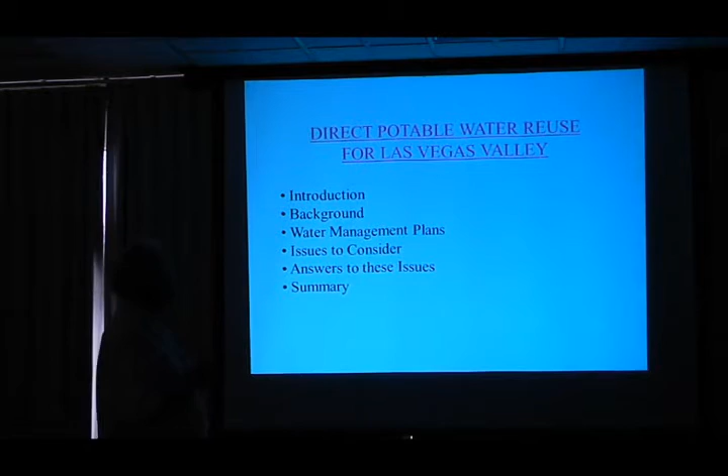So, with that, we're going to talk about a little introductory material first, then some background. I think it's important that we have background material to base what's going to come after. Then I'm going to discuss the water management plans, specifically the 300-mile pipeline going north, and my direct potable water reuse alternative. Issues to consider, I'm going to discuss those issues that have been brought up to me by my colleagues as being problems, but I call them challenges, I call them opportunities, and you'll see what I mean later on. With answers to these issues, and then a summary.

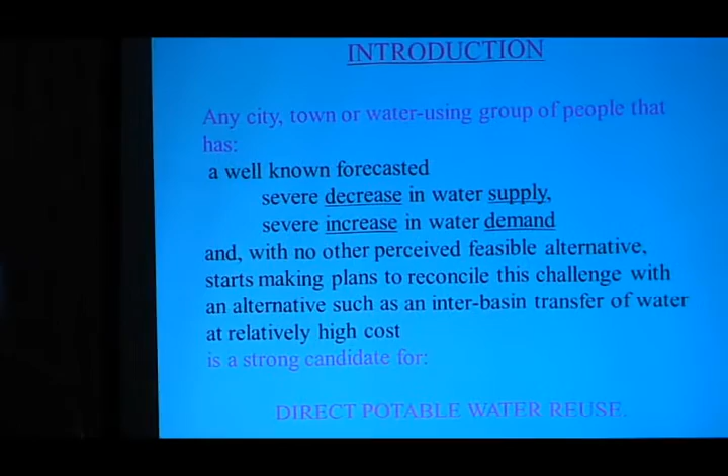Okay, let's get going. I start with a premise. You know what a premise is? It's something before, as a thought. Any city, town, or water-using group of people that has a well-known forecasted severe decrease in water supply, and also a severe increase in water demand, and at the same time, a feasible alternative might be to make plans for interbasin transfer of water. Does that sound familiar? Like that might apply to us here in Las Vegas Valley? Yes, it does. But I'm saying that that is a strong candidate for direct potable water reuse. I'll hope to justify that in a minute.

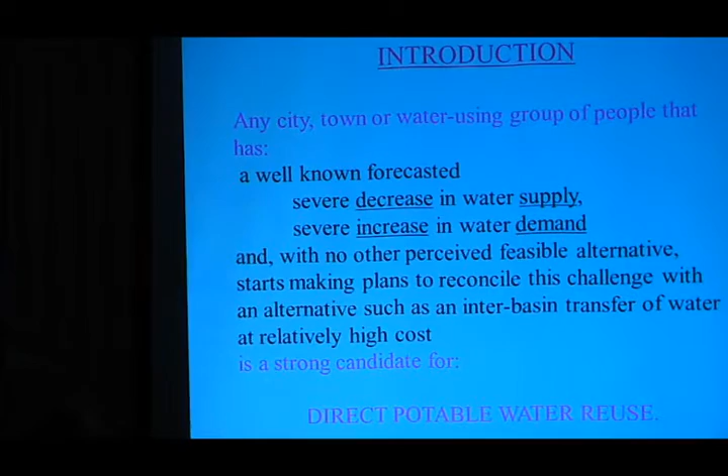So what is direct potable water reuse? Well, it's defined in the Journal of Water Reuse as the term that refers to the introduction of purified water derived from municipal wastewater, after extensive treatment and monitoring to assure that strict water quality requirements are met at all times, directly into a municipal water supply system. Kind of, the English grammar here is there's a noun and a verb: the noun is purified water, and the verb is that it's introduced into a municipal water supply system.

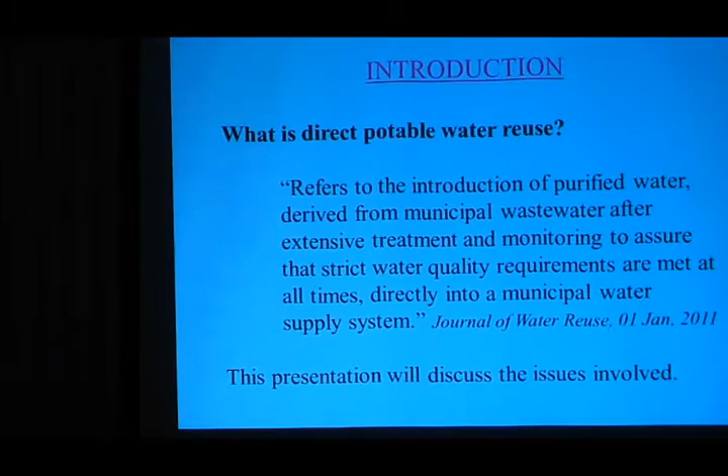So this presentation will discuss those issues.

A bunch of acronyms, which most of you are familiar with. Adrian, is that you? So let me retake it. All right, start.

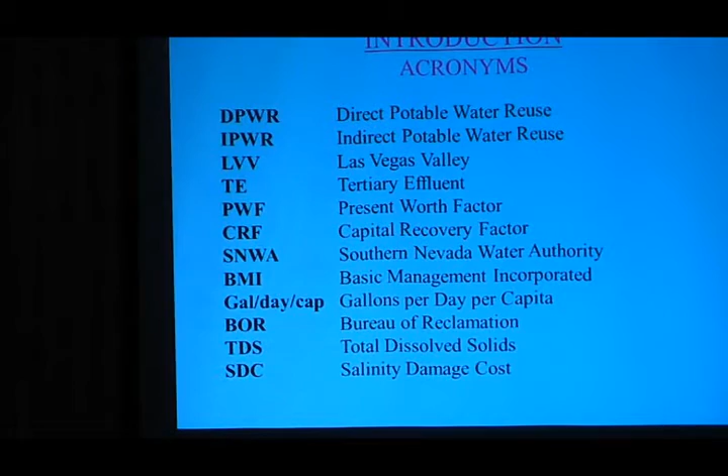Most of you are familiar with these acronyms, so I won't even go over them, but you can look at them for me. I will point out one little peeve I have, if I can point to it: gallons per day per capita. Most people say gallons per capita per day. That's just a peeve of mine, it's flow per capita, so it's gallons per day per capita. And when you use it in a formula, you're multiplying gallons per day per capita times capita, the capitas cancel out. When I teach operators about unit dimensional analysis, then it makes a lot more sense to use gallons per day per capita. That's in conflict with many people that talk about per capita flow.

Okay, let's go to the next. Okay, I want to introduce some background material. Existing water sources for Las Vegas Valley are 3 sources.

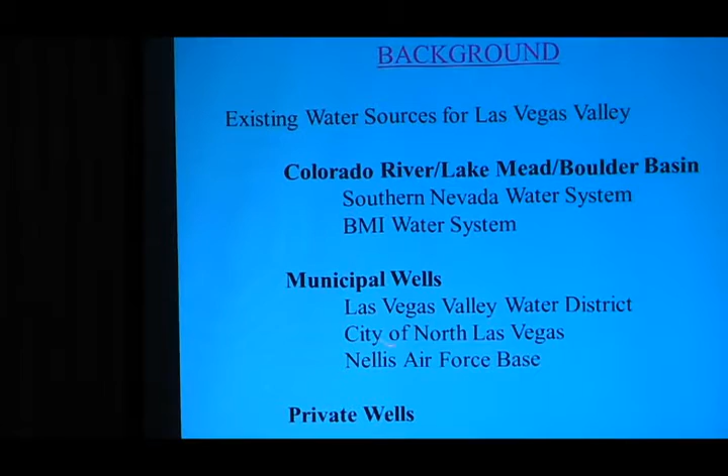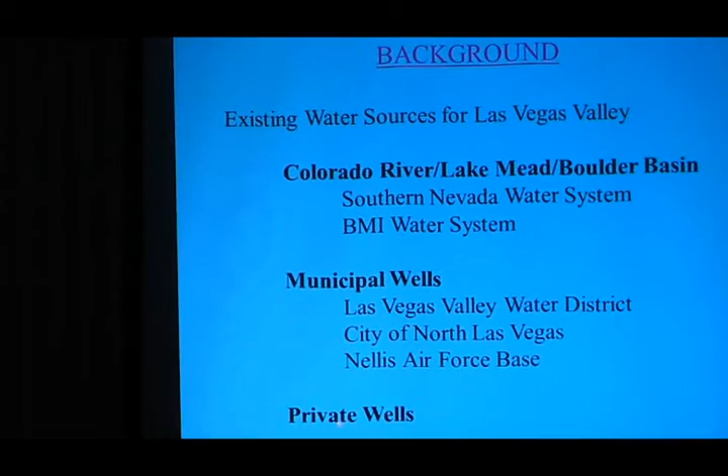Colorado River, as most of you know. Municipal wells, which some of you might not know. And private wells, which I didn't know about until recently. It takes it through the Southern Nevada water system and the BMI water system, basic management for Henderson. Municipal wells are in Las Vegas Valley Water District and in the city of North Las Vegas. And Nellis Air Force Base also has municipal-type wells, not private wells, municipal-type wells. And then, of course, private wells that are listed on the bottom.

I'm surprised by the amount of flow that we get from private wells. It's somewhere around 20 to 23 MGD, million gallons per day, which if municipal wells is around 40, plus 23 is 63, if my math is right. When you divide 23 by 60, it's about 30% of the total wells. And then the total wells as part of the total coming into municipal, into Las Vegas Valley, is about 40%. The other 60% is brought in from Boulder Basin.

Well, no, I'm wrong. About 90% is brought in from Boulder Basin. 10% is from both municipal and private wells. Okay.

Let's go to the next. I never see this. There we go.

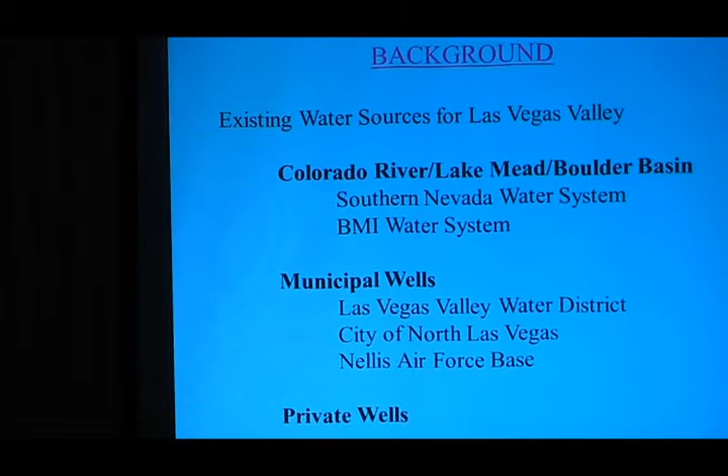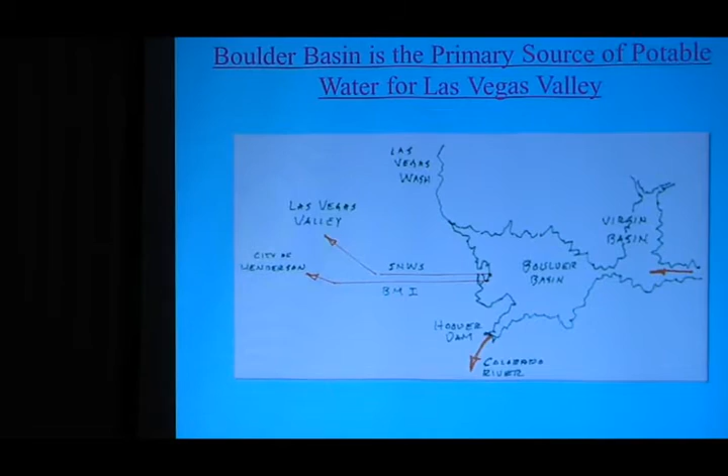Here's a picture of the total Southern Nevada water system, which is the major system in Las Vegas Valley. You'll see it takes water from Boulder Basin and through the Las Vegas lateral, the Pittman lateral, and other south laterals, distributes and transmits water all over Las Vegas Valley. So the Southern Nevada Water System is the wholesaler, and Las Vegas Valley Water District is a retailer, as well as the system at Henderson.

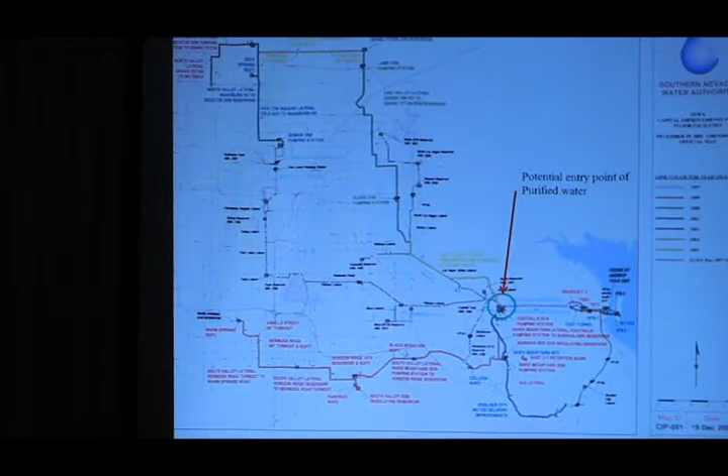Okay, I wanted to now go to a flow diagram of all the water and wastewater entities in Las Vegas Valley. This is still background material for my talk. Here I have put together a flow schematic.

I call it a flow schematic, but it's kind of semi-physical in that Boulder Basin is down at the southeastern end, and water is brought into Las Vegas Valley, then used, and the water flows easterly towards Las Vegas Wash. So it's kind of convenient—we always read from left to right, and that's the situation here in Las Vegas Valley, where north is up and you can read east to west or west to east.

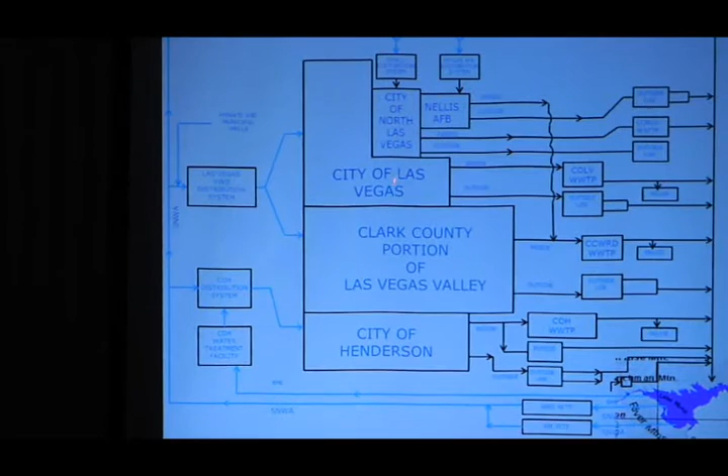Any questions about this? I also show inside and outside use for each entity—inside, outside, inside, outside, inside, outside. This is important because later on we're going to talk about the amount of water used inside, which becomes the wastewater going to the wastewater treatment plants. All the other flow used by water users in Las Vegas Valley is outside use.

Now, inside use is measured very well at wastewater treatment plants. Adrian, would you say plus or minus 2% is your accuracy? We used to have Parshall flow meters at the county, now we have magnetic flow meters. The Parshall flow meters are plus or minus 5%, the magnetic flow meters are plus or minus 2%, so it's a lot more accurate. So the inside use that we show here is relatively accurate.

When you subtract the inside use from the incoming flow, we know what the outside use is, just by subtraction.

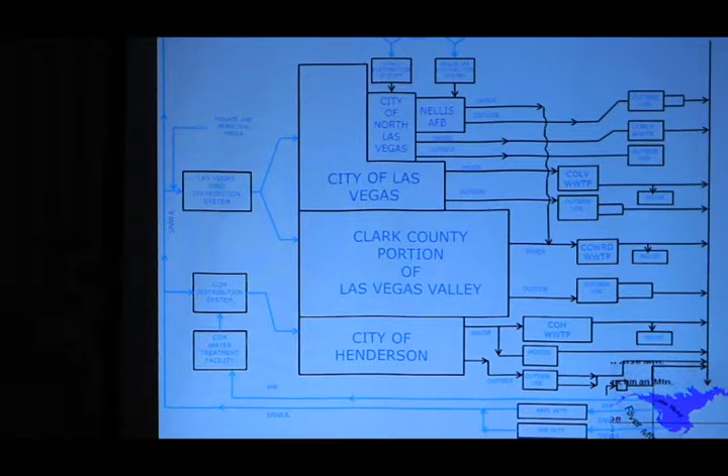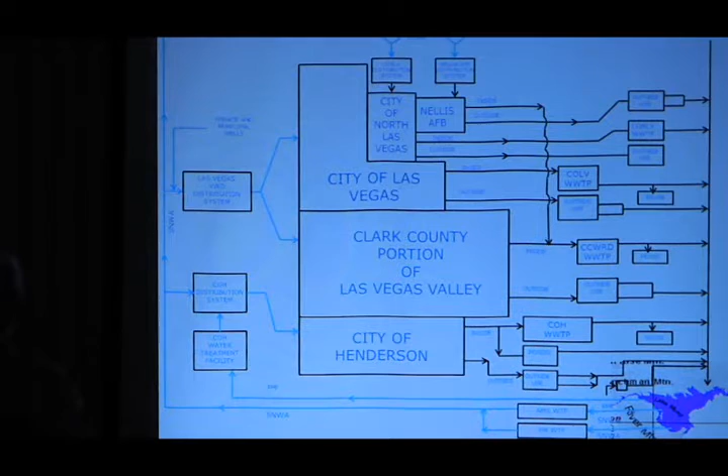Inside use right now—does anybody have an idea what percent is inside and what percent is outside? Last year the average was 43% inside, 57% outside. An interesting side note is that here in the desert we use more water outside than, say, Seattle or Portland, where it's about 60 to 65%. Here it's reversed—we're using about 43% inside and 57% outside, whereas Seattle and Portland are about 65% going to the treatment plants.

Okay, so you get an idea of the whole valley here, the water picture: potable water, wastewater, discharge to Las Vegas Wash, and then back to Boulder Basin. I'll talk about that cycle here in a little bit and how it affects the quality of the water that we drink.

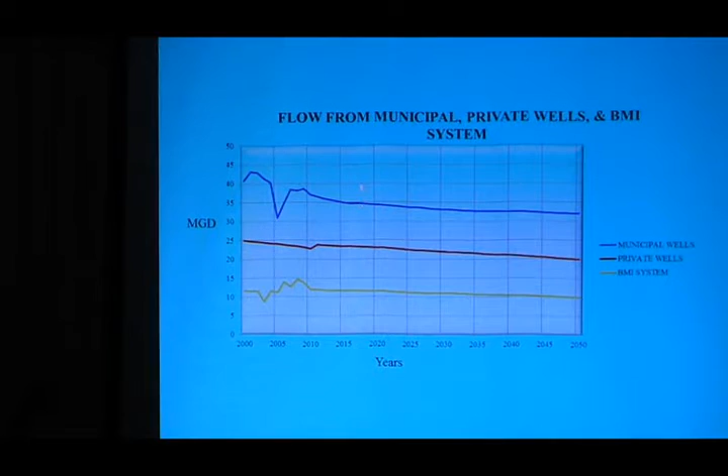I mentioned that SNWA, or SNWS, the Southern Nevada Water System, physically is about 90% of our potable water system. That means the other 10 or 12% is from municipal wells, private wells, and the BMI system. If you add these up, maybe 12 and 23 and 35, MGD-wise it's about 60 some MGD out of the 400 total brought in by SNWS. So you can see the proportions here.

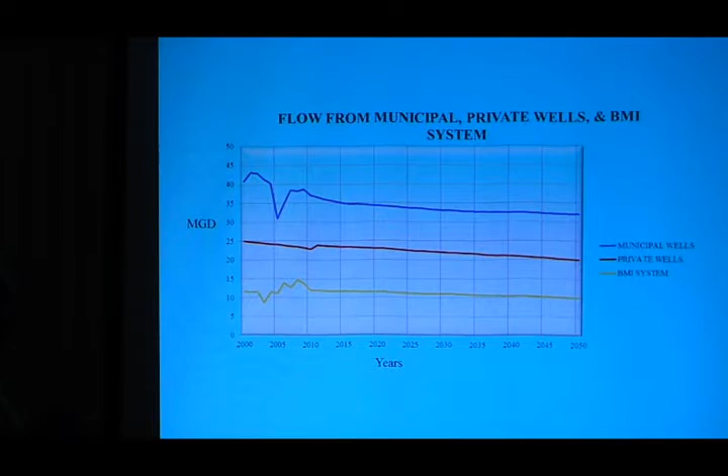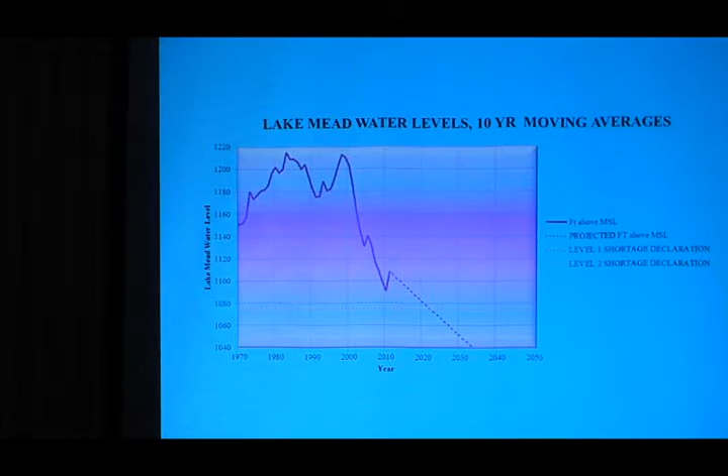Conventional reuse—I use the word conventional because I don't want to confuse it with direct potable water reuse or indirect potable water reuse. So conventional reuse is landscape irrigation, cooling tower makeup water, and beautification, like along the highway in Henderson, and maybe a cemetery in Henderson too. So that's conventional reuse, and it's taken from tertiary effluent.

Now, I haven't explained what tertiary effluent is, but I think most of you know. At the wastewater treatment plant—I still use the word 'we' because I used to work there, I apologize—we use primary treatment, secondary treatment, and tertiary treatment. I'm not going to explain all of what's involved, but tertiary treatment is fairly high quality treatment of wastewater.

Here in Las Vegas—and I'm not just talking about the county plant, but the City of Las Vegas plant, the North Las Vegas city plant, and the City of Henderson plant combined—the tertiary effluent is one of the best in the nation. Why? Because we're trying to protect Lake Mead from phosphorus and nitrogen through nutrient removal. So this is conventional reuse that's diverted from the tertiary effluent from the treatment plants.

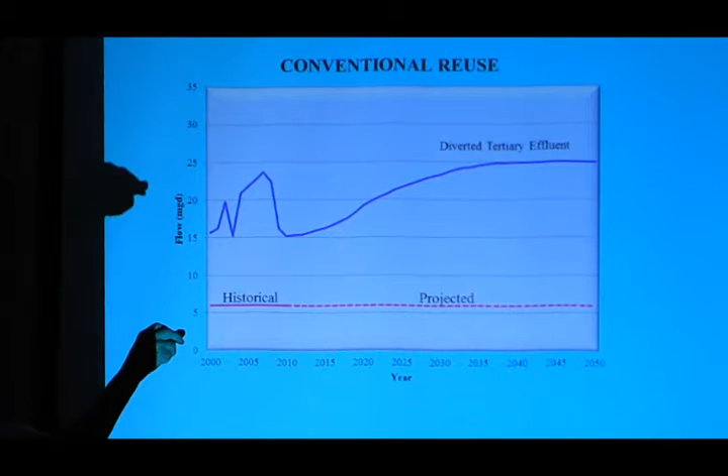Well, how come it's so different now? That's because it's an older report, and a lot has happened in the 12 years since then. We now have water conservation measures out at the golf courses and in general landscape irrigation, which has caused this dip. But I'm predicting it will still climb somewhat, and we might get up to about 25 MGD.

Now, what's this got to do with direct potable water reuse and today's talk? Well, if we take tertiary effluent, this flow is what I could use for reverse osmosis treatment, which I'm going to explain later on, for direct potable water reuse. Okay, let's go to the next slide.

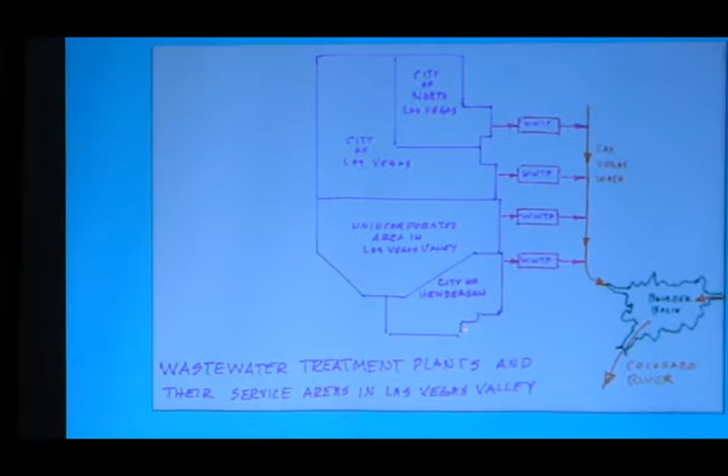Okay, this is just the wastewater system. You can see City of North Las Vegas, and they're lined up more or less physically as they are out there in the Las Vegas Valley, with the four treatment plants all discharging to the Las Vegas Wash and the Boulder Basin. Okay, that's old news for many people.

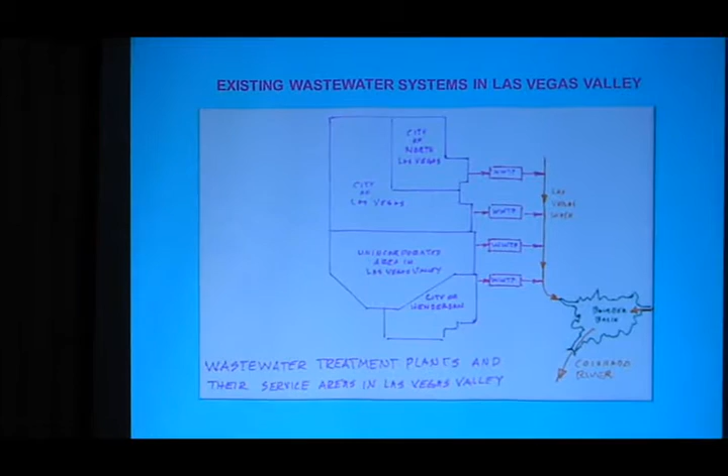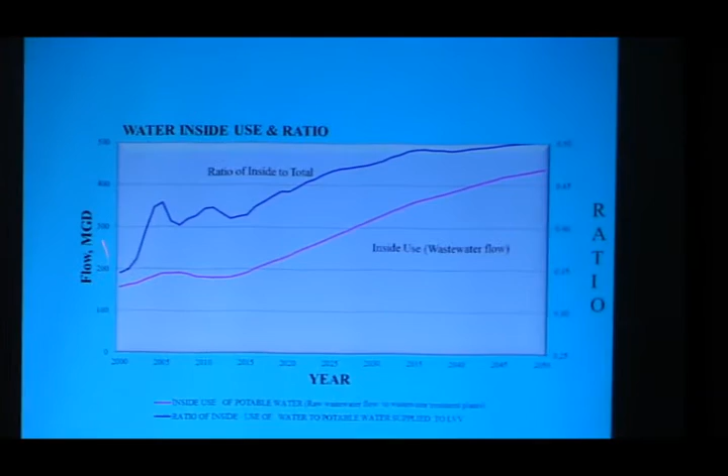What's interesting is to look at the inside use of water on this scale here. The inside use is the total of all the wastewater incoming and outgoing from the treatment plants. It's right now at about 180. There's nobody here from the county plant to verify it, right?

Adrian, at Henderson, you're at about 16—where are you discharging to, the wash? I knew that was coming up. It's about 175 total, it gives out. Is 175 related to this? Mm-hmm, yeah, that's about right here for us, 175.

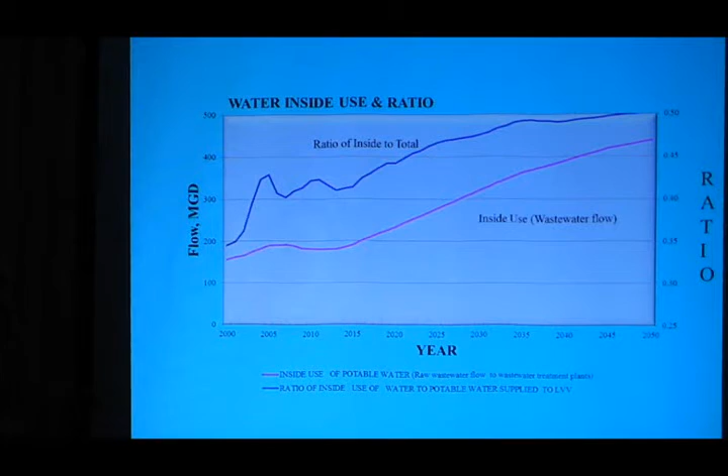But I'm predicting that with growth in Las Vegas Valley, wastewater flow is going to increase—we're going to get up to 430 MGD by the year 2050. But remember that ratio I was talking about, the inside use of water related to the total water brought into the valley, being around 43% right now? Well, here we are at a ratio—I'm a little bit off.

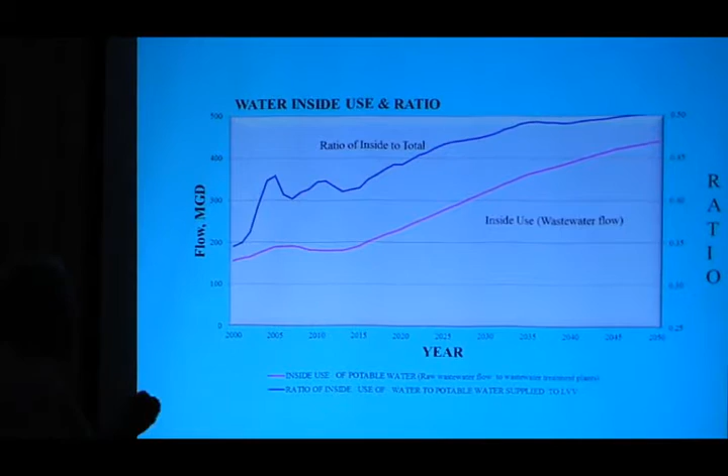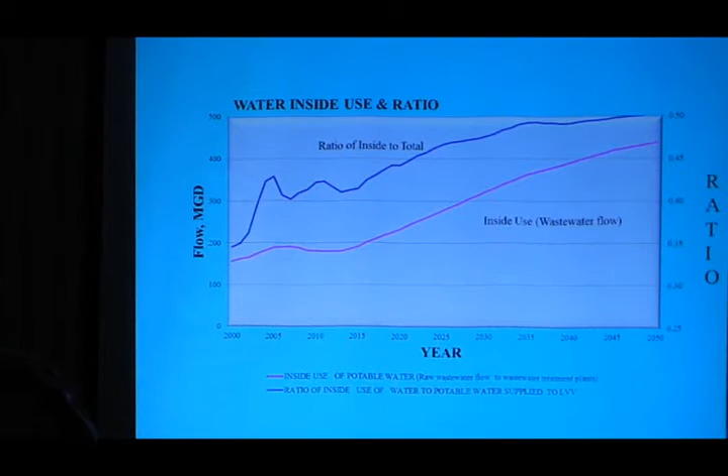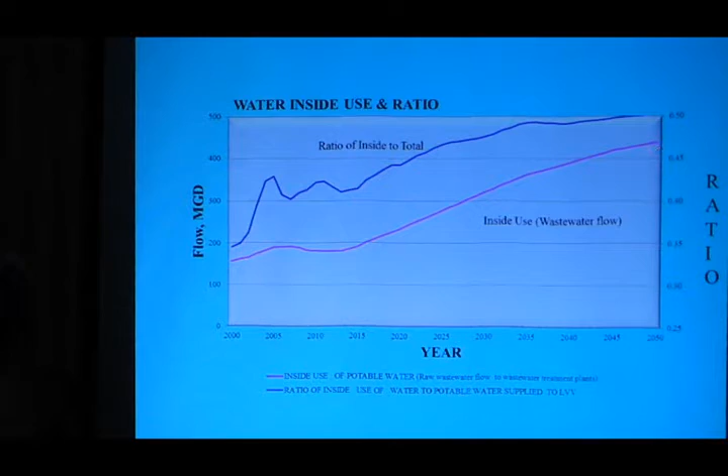43 would be right about there, and here we are in 2012. That ratio is going to increase, because the outside use ratio is going to decrease with more water conservation and less landscape irrigation, as people switch over to xeriscape landscaping. Since percentages have to add up to 100%, if outside use goes down, the inside water ratio increases. That's exactly what happens here, increasing up to almost 50%—47% by the year 2050. So that's something to look forward to.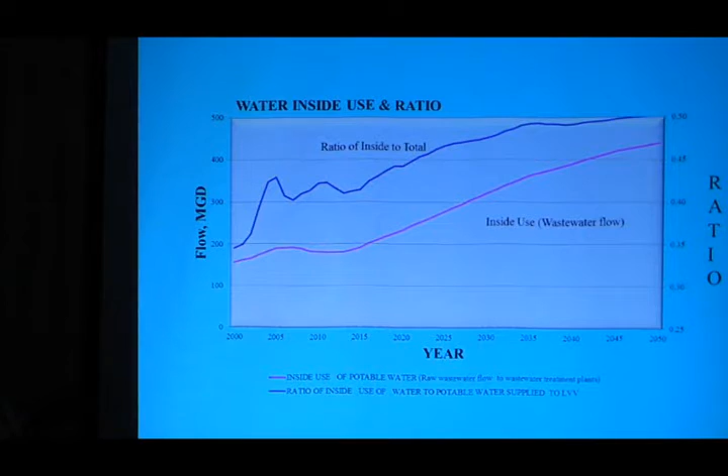Next slide. I think I skipped a slide here. Water cycle.

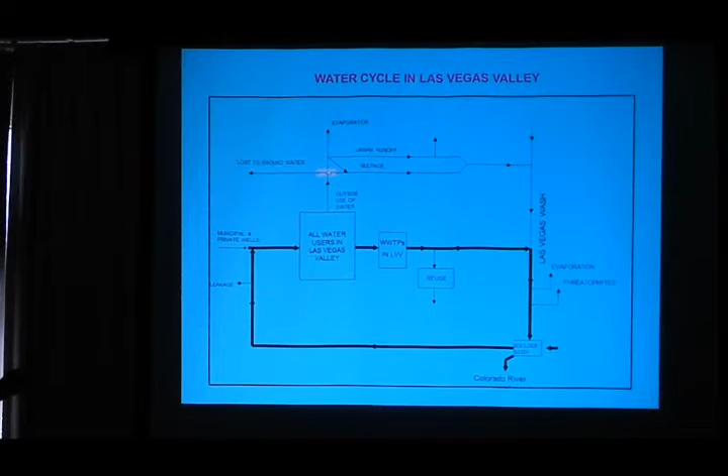Then the remaining here, lost to groundwater, is around 150 MGD. That was a big discovery for me and for the university when we studied this together. Is there any questions about this? Can you see I've also added the evaporation of phreatophyte use? Phreatophytes are vegetation with long roots that reach down to the water table, and therefore they evapotranspirate and add to the evaporation out of the system.

How are we doing on time, Carl? I've got 12:27. I think we're okay.

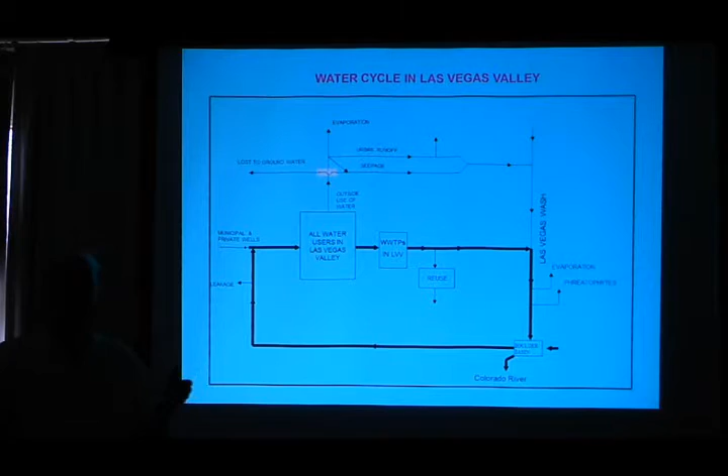So I can explain this a little bit. I've done a water mass balance of this entire system, and there's many water paths, some not even shown here, that have to be calculated—6 pages for the first spreadsheet. Then when I did a water mass balance using the Groundwater Development Project, a 300-mile pipeline up to the northern counties to bring rural water down to Las Vegas Valley, that was also 6 pages of spreadsheet. But when I did it for direct potable water reuse, which is going to take longer and really complicates my schematic diagram, it took 12 pages of water mass balance. I was going to bring it, but I didn't bring it today.

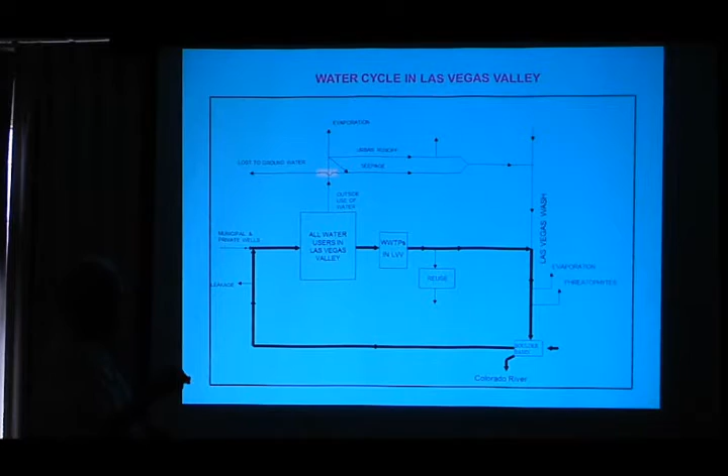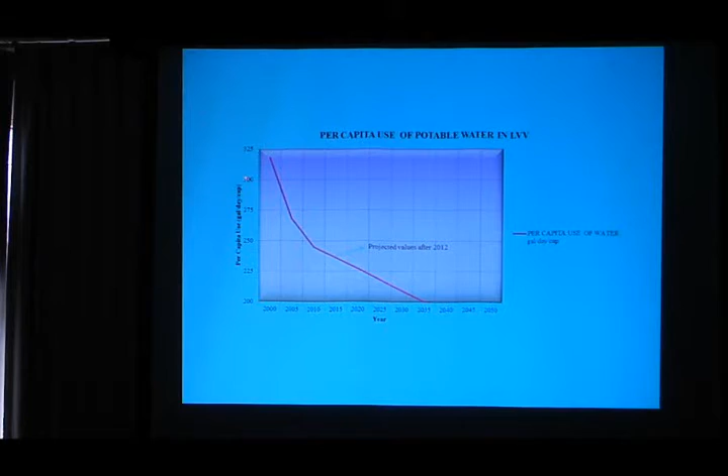Okay, let's proceed. Here's per capita use that I talked about previously. You can see way back in the 1990s we were up around 300 gallons per day per capita. With efforts by SNWA Water Authority and Las Vegas Valley Water District on conservation, they've reduced this quite a ways, down to around 230 gallons per day per capita recently, and now projected in the year 2035 down to 200 gallons per day per capita, as I mentioned before. Let's proceed.

Before I show that slide, I want to say some things first. One of the challenges I hear when I talk about a direct potable water reuse system for Las Vegas Valley is, one, it's going to cost too much; two, it's going to impact the return flow credits because reverse osmosis has all this brine flow which leaves the system; and three, public perception. Those three issues I'm going to talk about in just a minute. But anyway, back to return flow credits.

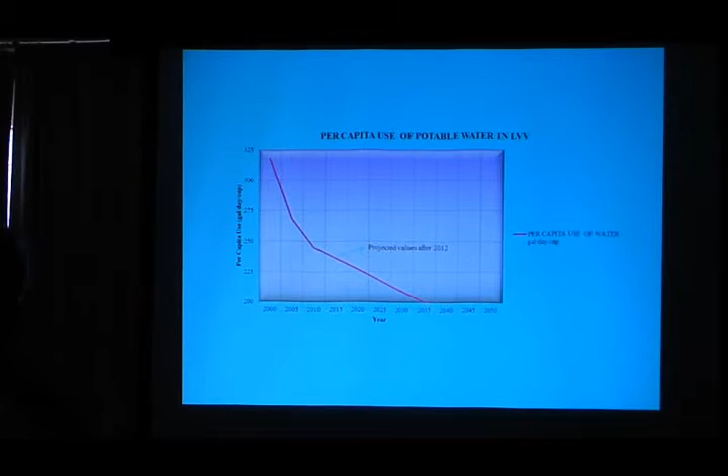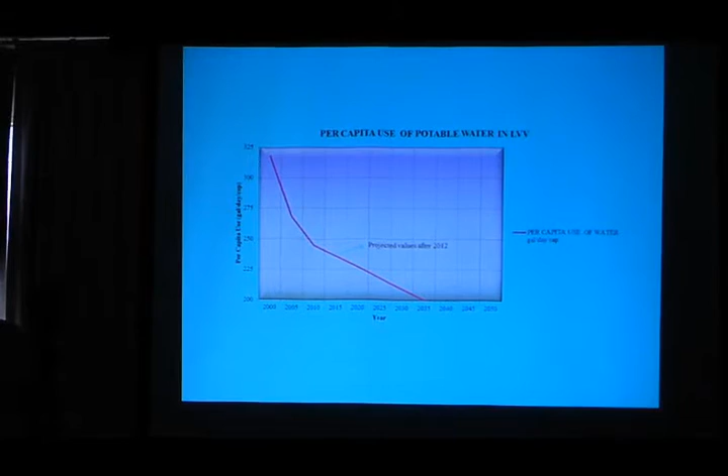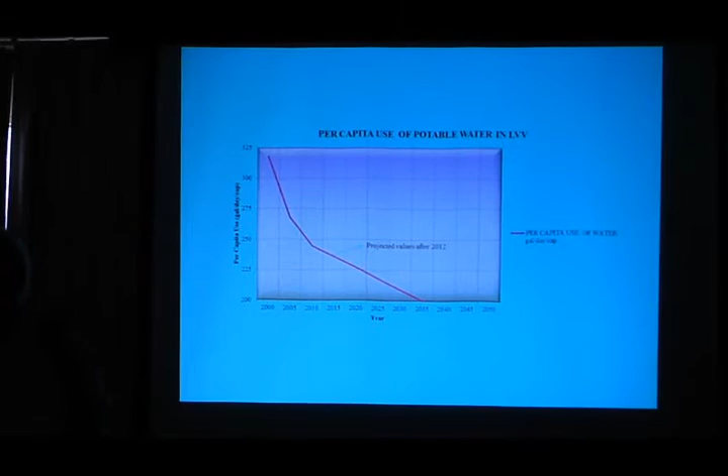It's not just return flow credits. Return flow credits is what Las Vegas Valley receives as an added amount to their official allotment. But that official allotment is 300,000 acre-feet per year, out of 15 million acre-feet per year that the lower basin—California, Arizona, Nevada, and Mexico—is allotted, plus 1.5 million acre-feet per year for Mexico. We only get 0.3 million acre-feet per year, which is exactly 2% of the total. That was thought of in 1922 with the compact that went into effect in 1929.

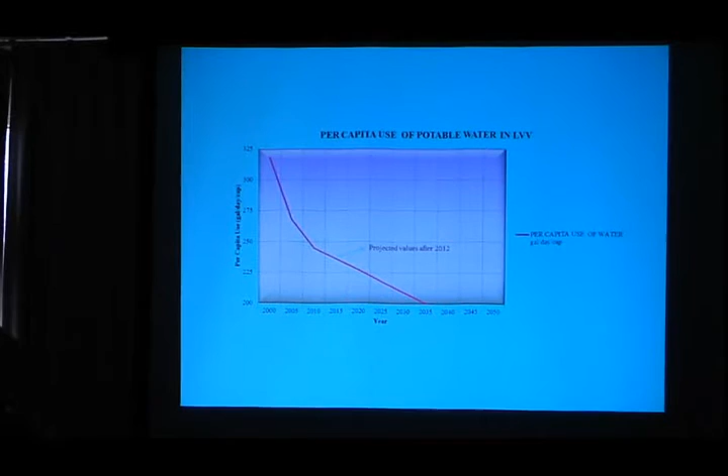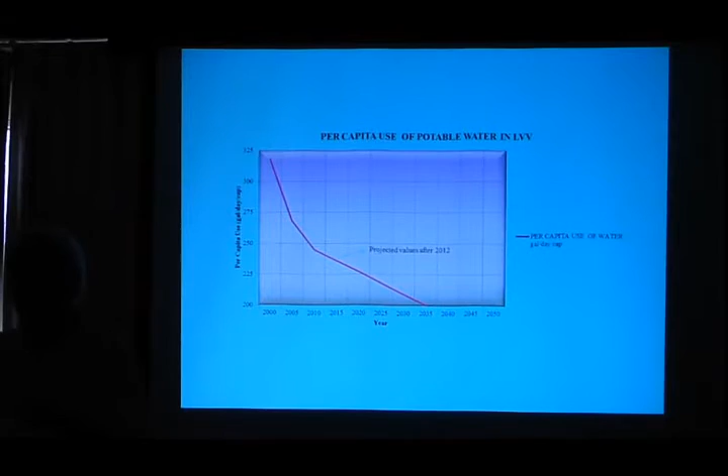So, here in Las Vegas Valley, that's for the state of Nevada. Non-Las Vegas Valley areas—Laughlin, Nelson Landing, some tribal units and other minor users—also take from the Colorado River as part of the state of Nevada allotment. So the unofficial allotment for Las Vegas Valley is somewhere around 285,000 acre-feet per year, subtracting 15,000. That 285,000 acre-feet per year is what Las Vegas Valley can consume or use—what they call consumptive use.

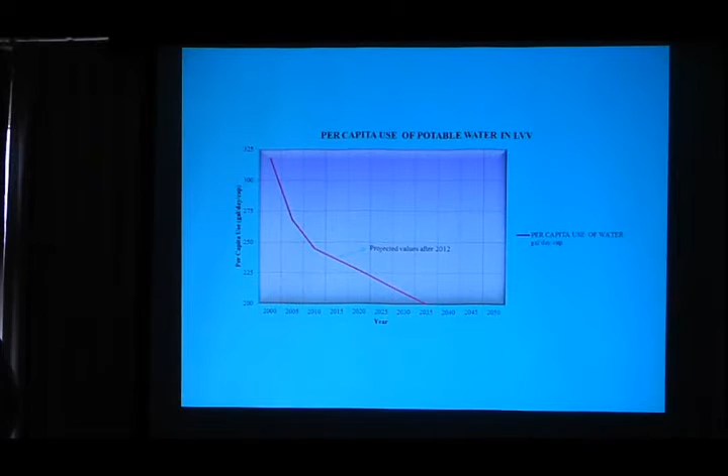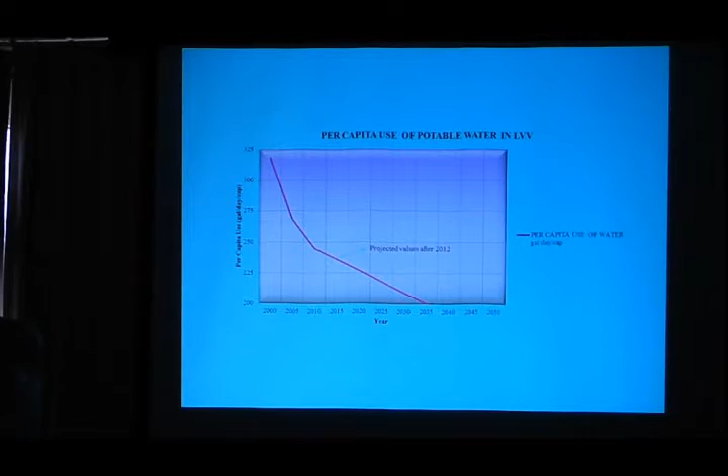But if we add that return flow credit to our consumptive use, we get X MGD or million acre-feet per year, and then compare that to the actual allotment, we're either over or under. So now let's see, over or under the unofficial allotment for Las Vegas Valley—now we're getting down to brass tacks.

I've listed no action, meaning no pipeline going north, no direct potable water reuse alternative—just no action over the years from 2020 to 2050. I started in 2020 because that's when the impacts of one of these alternatives would come into play. You can see that we're still below, under the allotment for several years yet. I was surprised to see this, but that's because of return flow credits and the things I mentioned before.

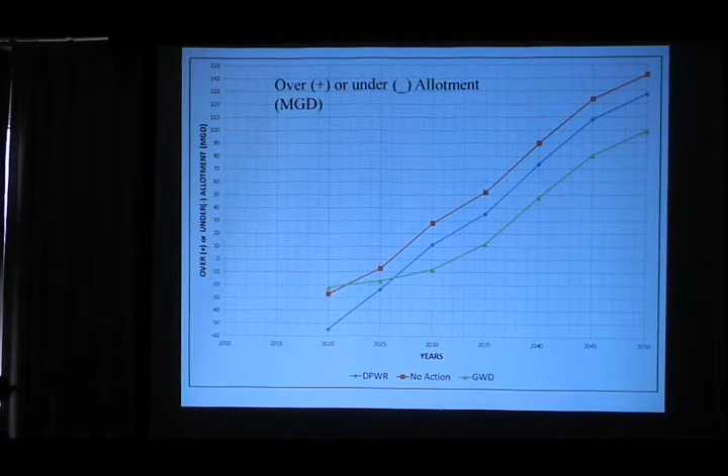Since anything under the zero line is good and anything over is bad, you can see we're in bad trouble after about year 2025 in that area. The difference between direct potable water reuse, the blue line, and the groundwater development project, the green line, is about 20 MGD—so it's not that much. Looking horizontally, years-wise, it's about a 5-year difference that the over-allocation relates to between the two alternatives. I think that's very interesting to look at—the over or under unofficial allotment of Las Vegas Valley.

The direct potable water reuse project would take tertiary effluent into an RO treatment facility. There would be brine that would go to a brine concentrator and then to evaporation ponds—at least that's the alternative I'm thinking of now. Then the product water, the purified water, would enter the potable water system at this point. All right, let's go to the next slide.

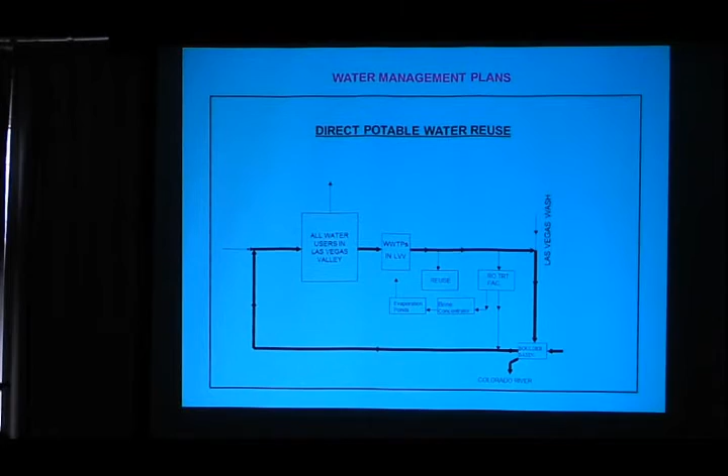This looks like a complicated slide in a way, but let me explain. Vertical scale is flow in MGD, horizontal scale is years. What I've shown here is the tertiary effluent flow coming from the treatment plants, and that would be after diversion to conventional reuse, which means that would be available for RO treatment, except for one thing.

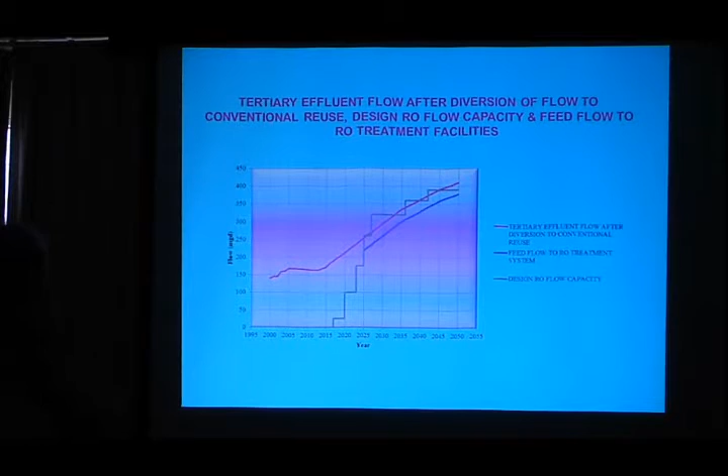Is there anybody here from the Las Vegas Wash Coordination Committee? Yeah, Brenda, maybe? Or you go to the meetings? Yeah, it's been a while. Yeah, Las Vegas Wash Coordination meeting—they should have another meeting in another couple of months, I think. But anyway, that Las Vegas Wash Coordination Committee has...

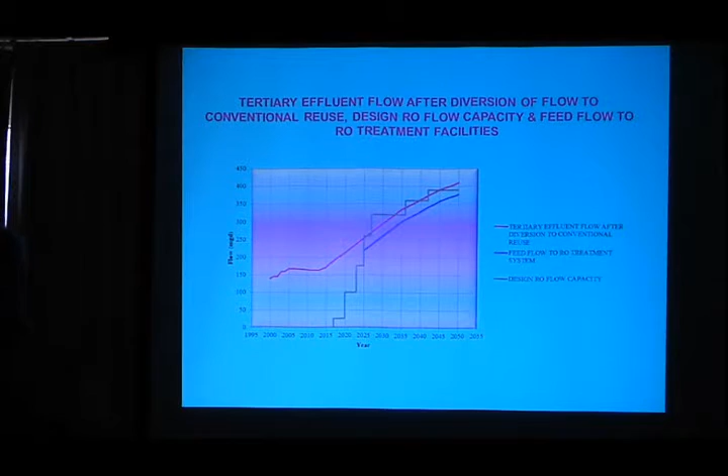Strongly requested that 70 MGD be left in Las Vegas Wash—don't take all of the tertiary effluent out, because that's the major flow into Las Vegas Wash. So Las Vegas Wash is an effluent-dominated stream, as EPA calls it. So there is a base flow—base flow is the urban runoff, the seepage, and precipitation. That base flow averages around 30 MGD, or 32 or 33.

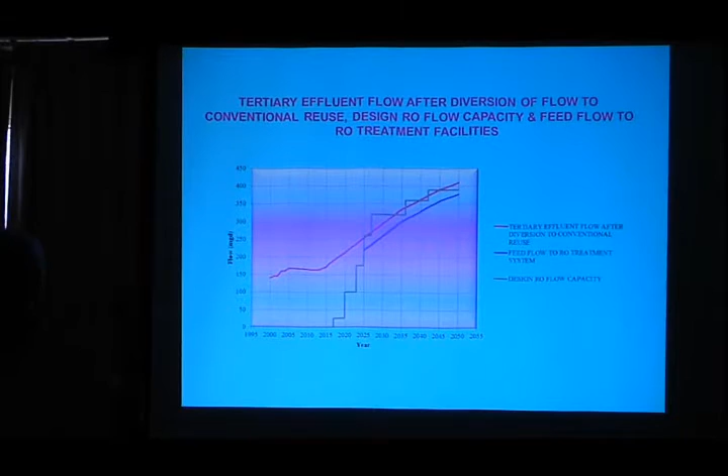Subtract from 70 means that we can allow about 32 or 33 mgd to go to the wash after we've taken our feed to the RO treatment system. But as we design and plan for the RO treatment capacity, we can only build so much at one time and then try to keep capacity above the blue line, which is the feed flow to RO treatment as a result of the tertiary effluent still going to the wash, and then it's left over for RO treatment. I know that's a little complicated, but that's the way it has to be.

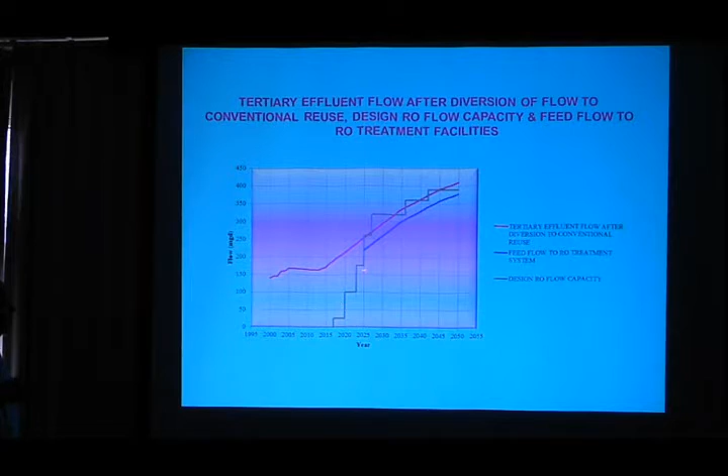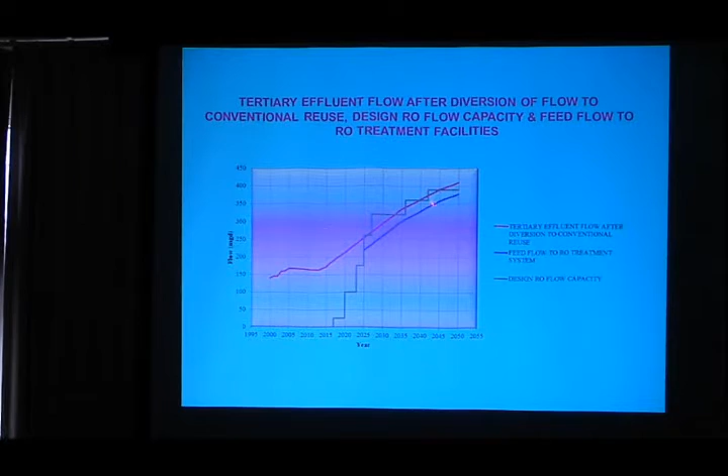Issues to consider with direct potable water reuse are return flow credit, cost, and public perception, as I just mentioned before.

I'm going to go into cost right away because I want to explain return flow credits a little more in just a minute. I had it listed first on that other list, but let's look at costs.

Now here I'm going to have to, Carl, how much time do I have left? About 20 minutes, 10 or 15 minutes? 20 minutes. 20 minutes, oh great.

Okay, because this will take a little bit. I'm going to give you a little bit of engineering economics 101 here. Whenever you compare two projects and they have costs, you always look at the capital costs and the annual O&M costs, capital and O&M, and compare apples to apples.

However, the capital costs of so many millions of dollars cannot be added to millions of dollars per year as an O&M or annual cost. So you have to annualize that capital cost, and there is a way to do that using what's called capital recovery factor.

Chris, you're probably familiar with this. Capital recovery factor takes into account the interest on the money, like municipal bonds around 6%. It takes into account the service life. In my case, design year 2050 from now, or from the year 2017 when we get started on the project, is about 32 or 33 years as a service life. So interest rate and service life will give you a capital recovery factor.

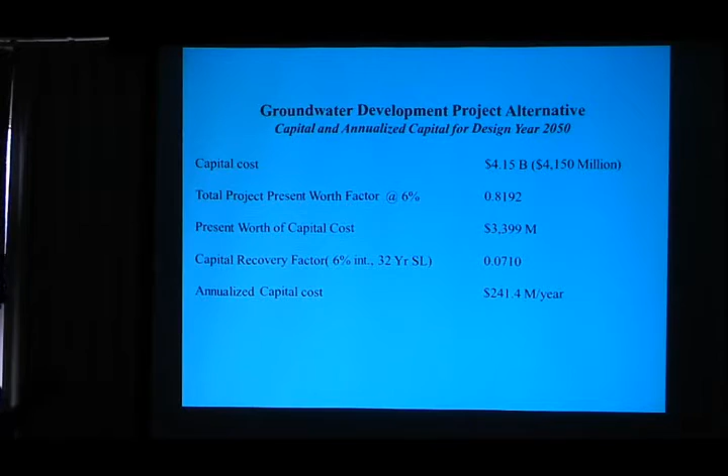Let's go to the next one. The annual cost, there's a lot of electrical costs associated with the groundwater development project, mainly the pumping from Boulder Basin to Las Vegas Valley. There's more electrical cost involved with this alternative as opposed to the direct potable water reuse alternative, because there will be less water pumped from Lake Mead, from Boulder Basin.

Let me explain salinity damage. The Bureau of Reclamation has already looked into salinity damage in Arizona, California, and Nevada, and they've come up with a figure of $134 per ton of salinity, or per ton of TDS. You can go tons per year, and then relate dollars per ton and arrive at 35.7 as the salinity damage in Las Vegas Valley.

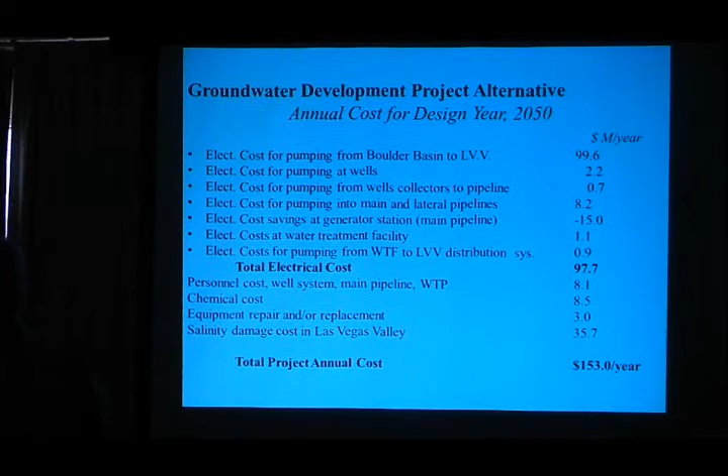Let's go to the next. Okay, now I'm not on the groundwater development project, I'm on the direct potable water reuse alternative. We're going to look at the capital and then the annual cost, and we'll add the total annual cost, compare it apples and apples with the pipeline.

Here's the total project capital cost I have come up with, $3.9 billion for doing a direct potable water reuse, and it involves many conservative estimates of the RO treatment facilities, a brine concentrator facility, product water pump station, product water pipeline to connect, and an effluent interceptor near Las Vegas Wash that would intercept and collect the tertiary effluent from various treatment plants. You'd have to have that.

However, that pipeline has already been designed by the Clean Water Coalition in their SCOP project. They've already designed that effluent interceptor, so it's kind of an advantage for me. The other advantage is the present worth analysis.

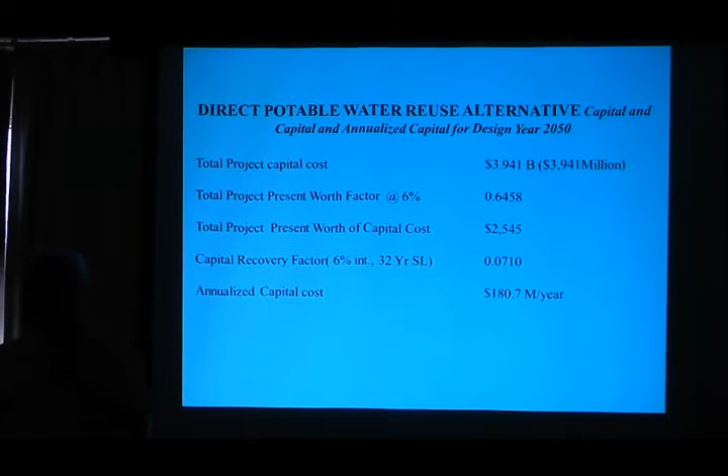I went through and did the present worth and all the different sub-portions of the total project and arrived at a weighted present worth factor. And there it is: 0.6458 times 3941 is 2545. Same capital recovery factor as the other alternative, apples and apples. So I arrive at an annualized capital cost of 180.

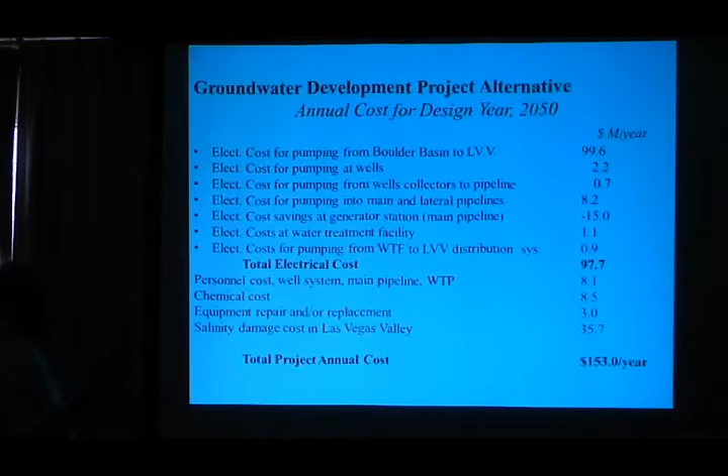If you're keeping track of these bottom line costs, good, but don't worry, I'm going to show it in the summary in just a minute. Here is the annual cost for the direct potable water development.

I'm sorry, let's go forward. Here's my annual cost for the direct potable water reuse, and you'll notice that pumping from Boulder Basin now is not 100 billion gallons and $100 million per year, it's 63.5. Why is it less?

We're pumping less water from Boulder Basin up into the ground. However, we still have to account for pumping that water through the RO membranes, which is not at 250 psi as the old membranes used to do for brackish water, which is what we have. But it's now down to 150 psi with newly designed membranes, so that is a big benefit to me in my estimation.

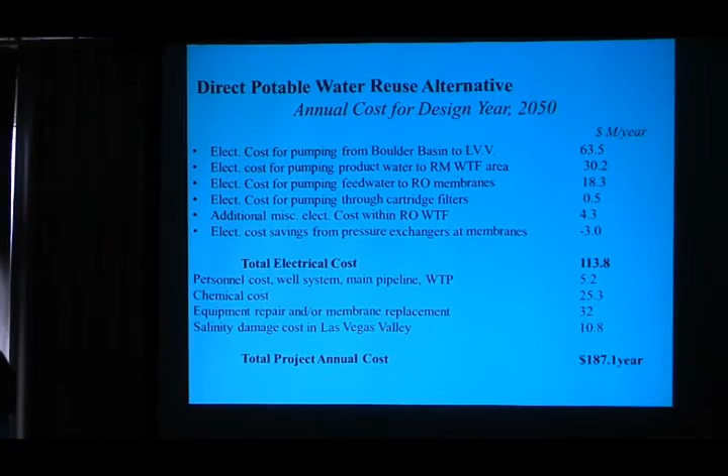There's also a marginal cost of pumping through cartridge filters, $500,000 per year additional. But I get a benefit of about $3 million a year with a pressure exchanger at the RO treatment. When you push water through an RO membrane, it's a cross-flow membrane, not plugged, so not all the flow goes through. You get a cross-flow, and at the end you have the brine still connected to that pressure you applied. The product water goes elsewhere, but the remaining pressure in the brine can be routed through a pressure exchanger and run through the pump feeding the RO system. So you gain a benefit there, which I've conservatively estimated at about $3 million a year.

So the total electrical cost is $113, a little more than the other alternative. However, we make it up in just a minute.

There's personnel, chemicals, equipment. Dr. Batista was going to be here today but isn't. When she saw this, she said, 'Wow, $32 million a year just for equipment repair.' But what she typed in was membrane replacement, because a membrane is good for about 7 years each, so you're replacing membranes roughly once every 7 years, depending how many you have. I've calculated and reconciled all that into a very conservative $32 million a year.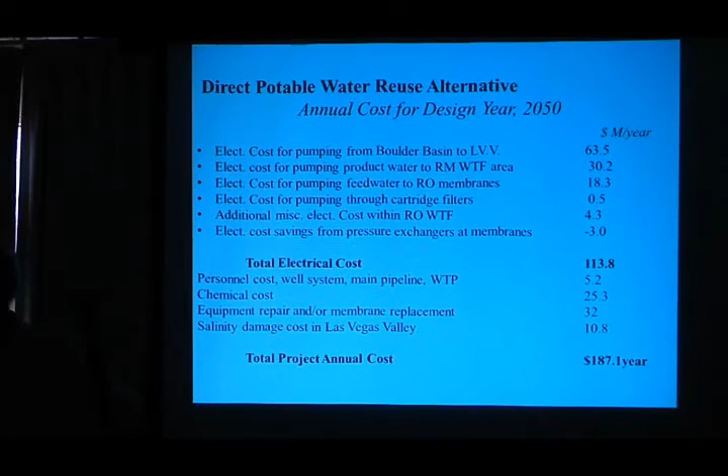And salinity damage is now at about $11 million a year, compared to about 37 with the other alternative. Let's go to the next slide.

We have the summary: groundwater development, direct potable water reuse, adding the annualized capital plus the annual costs for a total annual cost of 394 against 367. Those are the two magic numbers. Can you see them? Is it emblazoned in your mind? It's 394 against 367.

The difference is about $26 million a year. That's $26 million per year divided by 394, which gives about 6.7% difference between the direct potable water reuse alternative and the 300-mile pipeline alternative, in my estimation. I would welcome another engineer or consulting firm to look at my numbers, refine them, and see if it comes out close to what I have. I hope.

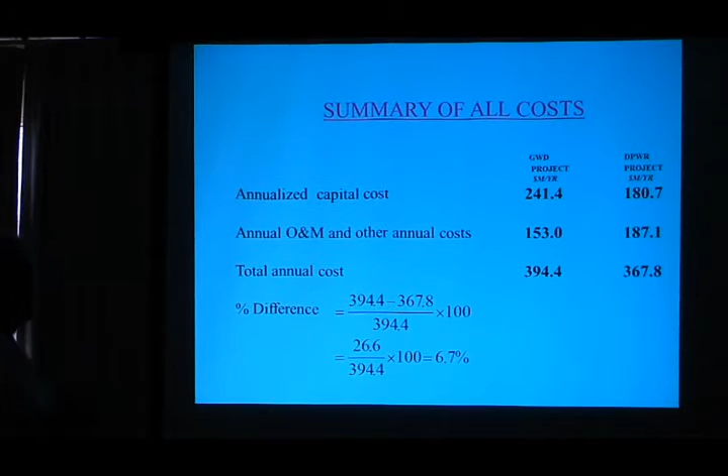Okay, any questions so far? Let's go to the next slide.

Return flow credits. Let's talk a bit more about return flow credits. There's an interpretation I see. First, from the state of Nevada's perspective, it's a credit allowing added diversion of the Colorado River to our legal entitlement. That's a big benefit for us to have that much return flow credit. That's how we see it here in Nevada.

However, the Bureau of Reclamation might see it as something that ultimately maximizes flow in the Colorado River. They're the water masters for the Colorado River, so they want to maximize flow available to everybody. They see it from a slightly different perspective than the state of Nevada does, as I see it.

Can you see this down below? Traditional thinking perceives RO treatment as a low to medium water recovery process. In other words, if you put 100 mgd into an RO membrane, traditional thinking says you get about 80% water recovery, meaning 20% is lost to brine. If it's seawater, it's even worse, you only get about 50 to 55%, versus 80 to 90% for brackish water at 2,000 TDS. The difference is because of salinity concentration, it's harder to push seawater through a membrane.

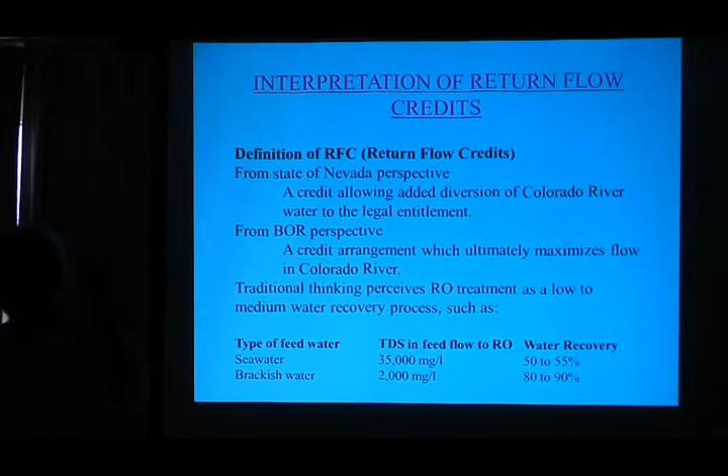Adrian, maybe you can help me here. Do you know what your TDS is coming into or leaving the plant? Is it around 1,200? Right around that, yeah. You have a little higher than other plants because of some groundwater infiltration with high TDS at the lower end of the wash. The other plants might be around 1,145, like the City of Las Vegas plant. Anyway, it's not 2,000, it's around 1,200 at most right now, and in later years it's going to increase.

Why is that? Does anybody have water softeners at their home? I'm sure many of you do. That brine goes into the wastewater collection system, into the sewer, and it's a highly concentrated brine. I don't know the exact concentration, but it adds to the TDS received at the wastewater treatment plants. In your NPDES discharge permit, Adrian, you're fully aware of this, there's a goal of no more than 400 milligrams per liter TDS increase in your discharge compared to the water coming into the community.

That's 400. It's not a mandate, it's not a violation if you exceed it, but it's a goal that EPA and NDEP want you to try to reach. But what happens is it's always around 500 or 550 instead of 400. Why? Because at least 200 of that is from water softener brine discharge, and the rest is from normal soaps, urine, and everything else going into wastewater treatment that adds to TDS.

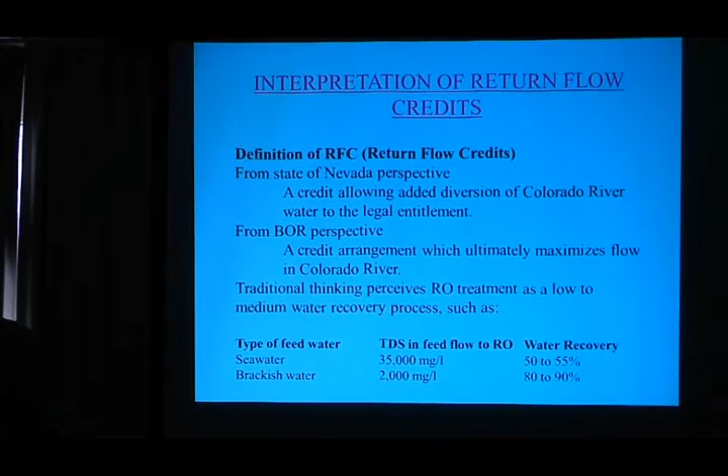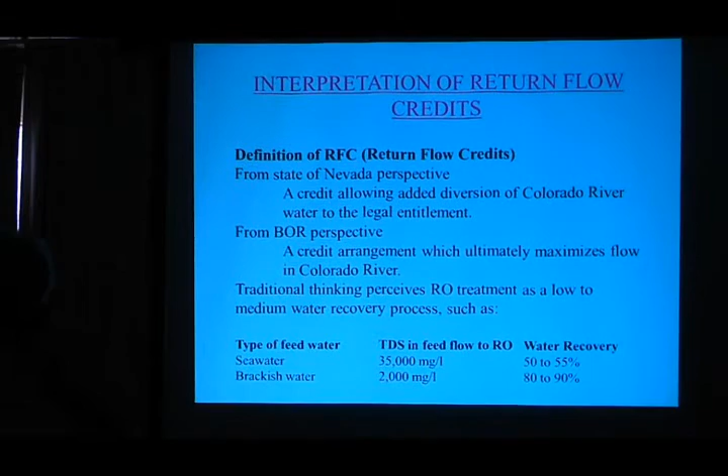I'm telling you that the wastewater treatment plant tertiary effluent is going to gain from 1,200 maybe up to around 1,300 by the year 2040 or 2050, way off in the distance. It might be up to around 1,400 if they continue with the same water softener use happening right now. It's contributing around 200,000 pounds per day of TDS, by the way.

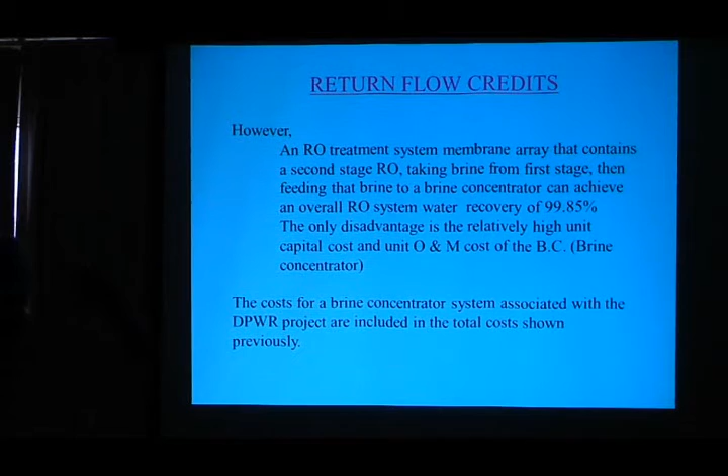Okay, so that said, we'll go to the next. Return flow. However, it's not that bad a situation with RO, with my direct potable water reuse. An RO system membrane array that contains a second stage RO, taking the brine from the first stage and putting it into a second stage, and then taking that brine into a brine concentrator - that total water recovery of that system is not 80% or 85% anymore.

It is, what am I showing there? 99.85. In other words, only 0.15% is lost and would have to go to an evaporation pond or some other disposal method. So it's only, how much, 5 minutes? 5 minutes. Okay, I'm almost through, so that's good. So it's a very low loss.

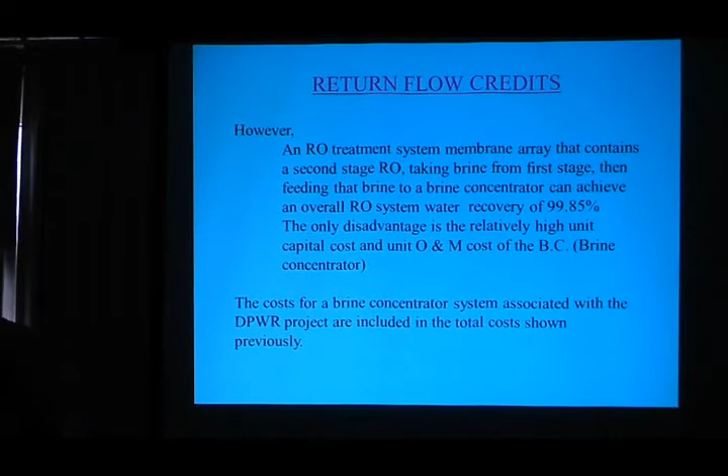So it does not affect return flow credits as much as some people think, because we could recover a lot from the RO system that I envision. Okay, so the only disadvantage is the relatively high unit capital cost - dollars per gallon fed to the brine concentrator - and the high unit O&M costs for the brine concentrator. But I already added those costs in those previous costs that I showed you, so I'm not going to go into it anymore.

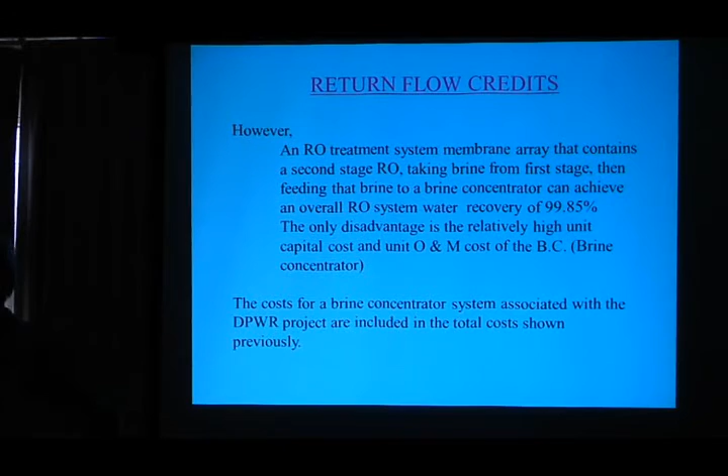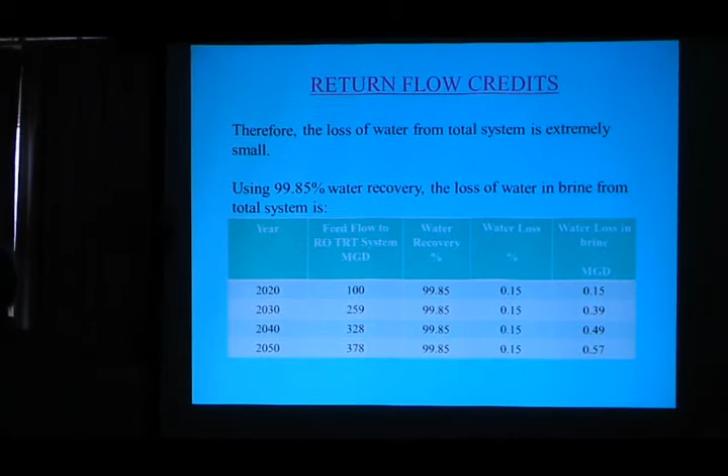Therefore, the loss of water from the total system is extremely small. Yeah, I went ahead and used that 0.85, so 99.85, which is about 60 or 70 gallons. It's like if I had my neighbor have a garden hose and I had my garden hose running at 10 GPM each, that's 20 GPM. So that's a small flow compared to our whole Las Vegas Valley water system.

Public perception is the next issue. Costs, reverse osmosis, return flow credits, and public perception - those are the three challenges that I mentioned before.

So public perception - a history of public perception shows that with sufficient orientation and publication, public outreach, perhaps some public relations people going to Kiwanis, churches, schools, to all these community groups and presenting what really can happen, like Orange County did with their system - they gained public acceptance. And they went ahead with their 70 MGD water reuse project. I can show this also with other water reuse projects.

Then eventually, the public can accept this indirect potable water reuse and direct potable water reuse. Now, the difference between indirect and direct is just an environmental barrier that is used after indirect potable water reuse. Like Orange County uses spreading basins in the Kraemer basin, where Imperial Highway goes over - the water seeps into the ground, and then it's pumped out. So it's an environmental barrier.

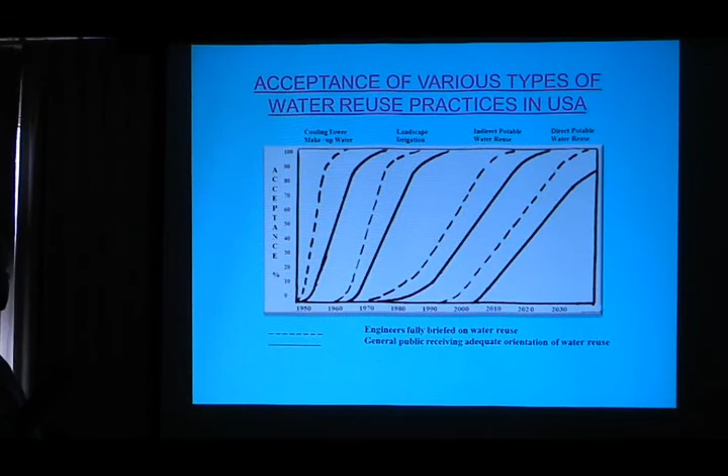That was the first diagram I did. I really want to show you the next one, which is better. This is

acceptance from 0 to 100% of either engineers who know about what water reuse really is - that's the dashed line - and the solid line is the general public, as I see it, showing their acceptance for cooling tower makeup water, which everybody accepts as no problem, way back in 1960. By the way, I've got 1950 to 2040 on the bottom, and this is 0 to 100%.

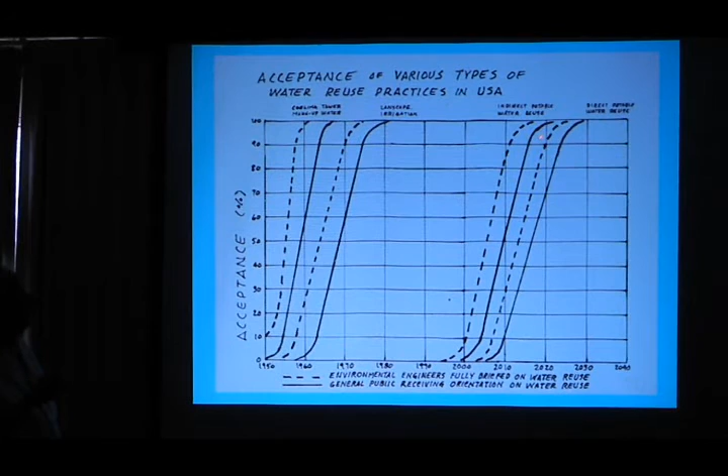Landscape irrigation was a little tougher sell, but finally everybody went for it. Now we are looking at indirect potable water reuse, which, as I said, several systems in the United States and around the world use. Environmental engineers have fully accepted this by the year 2012, and I see the general public, with education, accepting it in another couple of years. However, direct potable water reuse is still a hard sell - it needs public education, orientation, and outreach programs. I'm saying that by the year 2020 we'll have most of the engineers on board, and the general public by 2030. Okay, conclusions.

The background information shows that the potable water resources for Las Vegas Valley are limited. We know about that. Increased demand is going to overwhelm supply by the year 2019 or 2020.

The groundwater development project, which is the 300-mile pipeline sponsored by SNWA, is more costly than the direct potable water reuse project, in terms of money costs and environmental costs - which I would love to talk about, but I'm not an expert in that. I was hoping Dr. Deacon was going to be here. I talked to him a couple of days ago, but he couldn't make it; he was going to make some comments. But definitely there's big environmental costs.

Issues of cost, return flow credits, and public perception need not be negative issues. This is my summary: my recommendation is that the alternative, direct potable water reuse, be planned, designed, and constructed as soon as we can. Okay, questions?

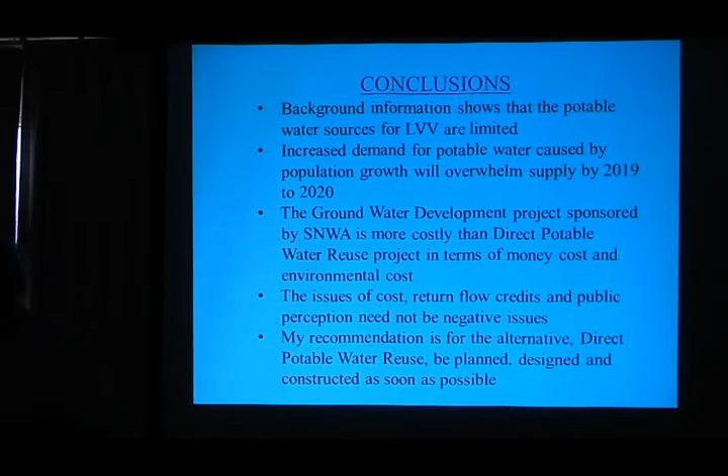What's the risk posed by some of the non-traditionally treated chemical constituents, like nicotine or pharmaceutical residuals, out of wastewater with a direct return? What's the risk in the direct potable water reuse scheme? What's the effectiveness of an RO unit in removing those constituents? How much will pass through? There have been studies of this - I'm not an expert on that either, but...

the reverse osmosis membrane pore size is such that it can remove molecules down to about 100 molecular weight - they call that the molecular cutoff. Most of the things you just mentioned - endocrine disruptors, caffeine, and pharmaceutical products - are above 100 molecular weight. So as far as I know, reverse osmosis membranes will remove maybe 95 to 99% of all that. But even if they don't remove that last 1% or 5%, how does that compare with the water we're drinking now? Do you know that? Because there's plenty in there.